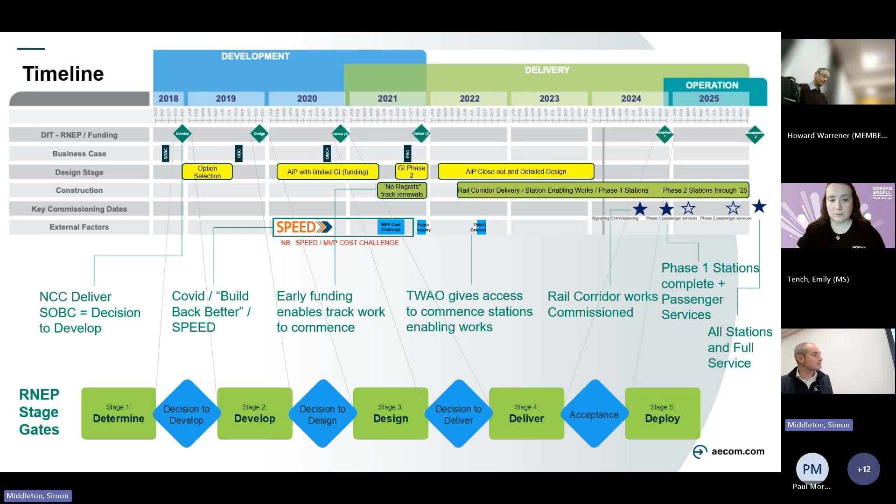So Northumberland County Council essentially have owned and sponsored the project. They've put funding into the scheme as well, so it's not all central government funding, and that's meant they've been able to really connect the local needs with the outputs of the project — for example, thinking about the requirements for where the stations were placed and the access to the station as part of the local active travel and cycle route networks and those sorts of things.

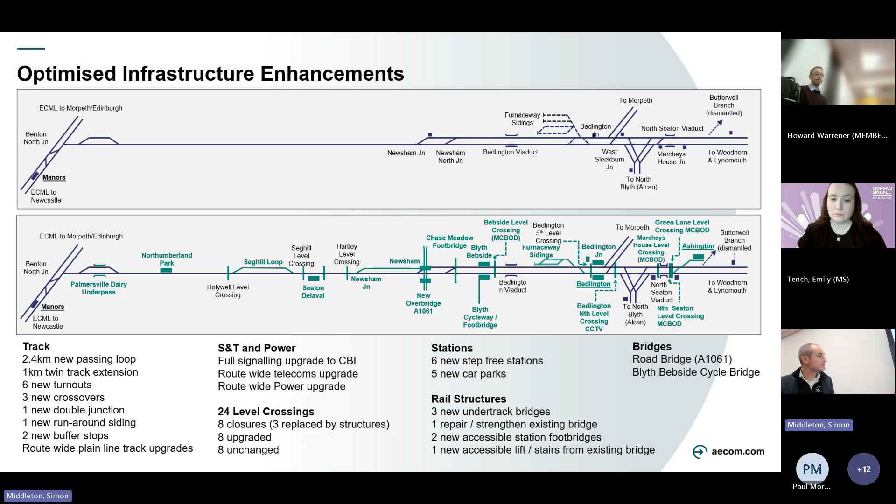And when I talk about the conductors, that puts a grin on my face, because last time I went up there I was talking to a conductor called Ashley who lives in Blyth. He was really just buzzing about the fact that he's now got a job working on this railway that's about 2 minutes from his house. He can cycle to his place of work, and there's this real local ownership around the project, which is fantastic.

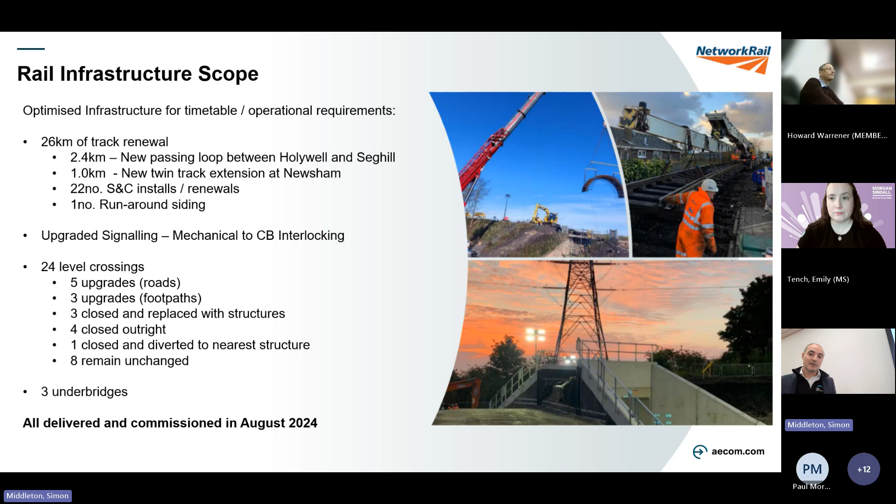And as I've touched on, there's 24 different types of crossing where either foot crossings or road crossings cross the railway. Those 24 have all been upgraded in different ways, but with some being closed outright. So that saves money in the fact that you don't need to introduce the infrastructure, but it creates a challenge that you have to go through a planning process to get those closed. Network Rail and their supply chain were also responsible for the construction and strengthening of 3 structures beneath the track.

We live in a pretty constrained environment in terms of budget, and linked as well to project speed. There was a real challenge on this project to make sure that everything we wanted to deliver was justifiable, and it was the lowest cost solution to give the solution that was required. So there's this phrase used in the railway industry called minimum viable product - essentially the lowest cost solution to delivering the output you need. We applied this before it was a thing, before Project Speed. We were already working on behalf of the local authority and the council to make sure this was the most cost-effective scheme possible.

That meant that when we're looking at the level crossing upgrades, there is an option to improve with modern technology all of the level crossings, but we went through a filtering process to make sure that the costs weren't disproportionate versus the risk for those level crossings. And as I say, we closed a few. I've also highlighted their...

Newsham level crossing. So this is a level crossing where the A1061, which is the main road into the Port of Blyth, crosses the railway. And in the morning peaks, just with the freight services, there were always challenges around the level crossing barrier downtime at this crossing, and the traffic would back up into the port.

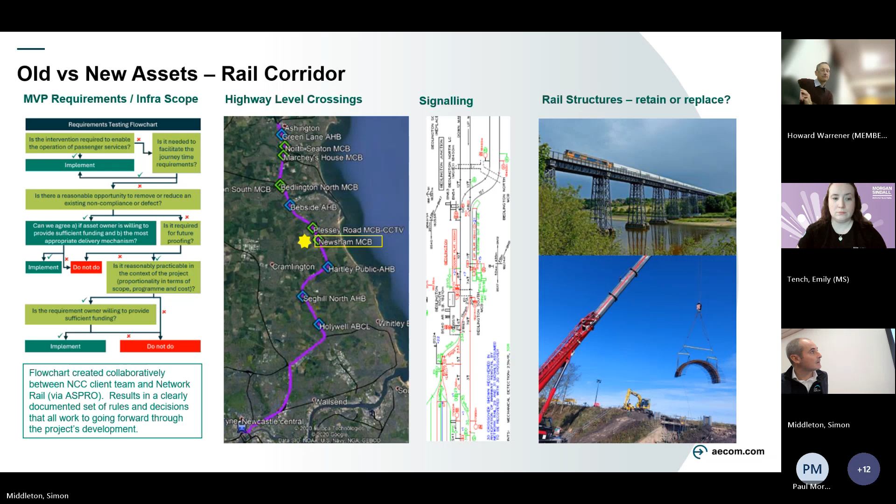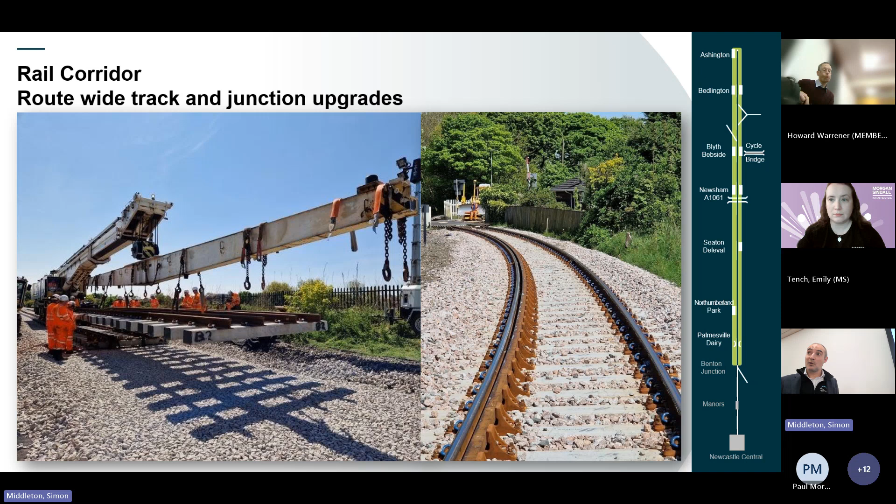As well as replacing the old track and old rails, there were quite a lot of junction improvements required to bring them up to modern standards for the required line speeds. This work was delivered predominantly throughout 2022 and 2023, so essentially the railway element of this project was delivered first. Some of it was done on a 'no regrets' basis, because the track was so old it needed replacing anyway, so Network Rail and their supply chain started before the project was fully funded, on the basis it would be money well spent.

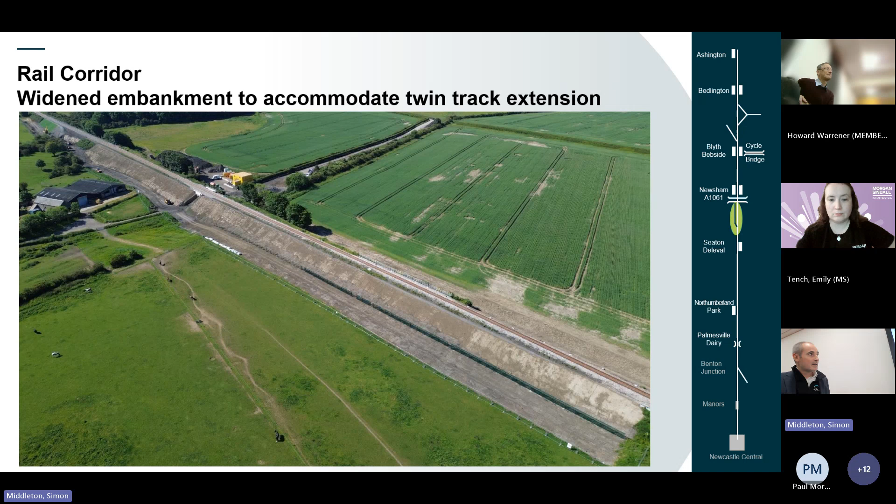As I've touched on, they've replaced 3 underbridges, predominantly in areas where the track needed to be widened. This is the section south of Newsham, where we needed a twin track section on the embankments. The embankment in theory was wide enough, but the alignment before we started weaved along it, because over time maintenance teams had shuffled the track into the middle as the embankment eroded. So it was an important aspect to upgrade that section of earthworks.

We've touched on Bedlington Station, which is flanked at either end by level crossings, with a track junction and signal box in the middle. This is quite a constrained site, but it was really important that Network Rail delivered the railway upgrade elements and were out of the way of the level crossings before Morgan Sindall could come along and deliver the stations.

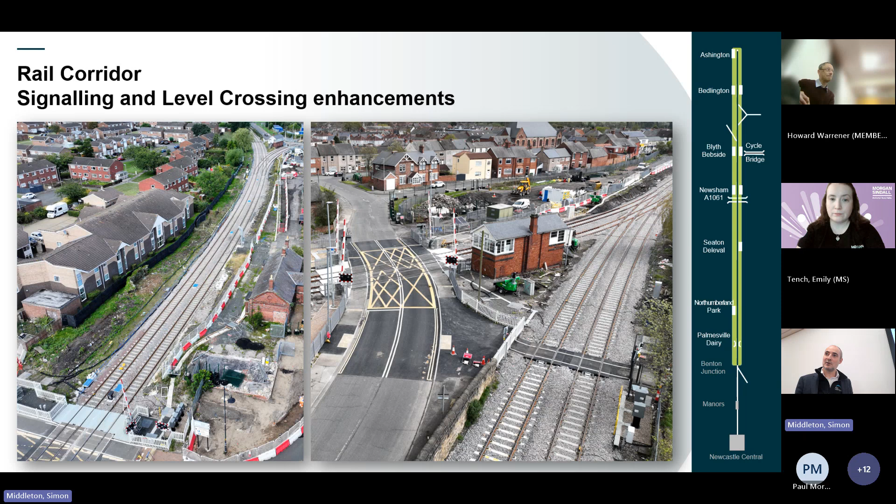Also, this is a constrained site - on the left-hand side of the left-hand picture is Sleekburn House, a residential home. So we're working in a very constrained urban environment, drilling holes, constructing literally outside people's windows. The public interface, stakeholder management, and communications about who was going to do what when was a really important aspect of this.

So we'll go on to the stations and the structures. This is the element delivered essentially by Northumberland County Council and Morgan Sindall - 6 stations, 4 now open, 5 of them with car parks. The car parks are of differing scale, linked to the idea of minimum viable product and funding constraints.

One of the challenges we had with the project, as costs started to go up, we were challenged by the DFT to take costs out, and one area where that could be done was reducing car park size. We've got the land for bigger car parks, but at the moment we've only constructed, say at Seaton, half the scale of the car park initially planned. At the moment those car parks are absolutely chock-a-block, which is a challenge, but we don't know if that will be the case once all the stations have opened. So I'm pretty confident that in future years there'll be work to expand those car parks using the land we've got.

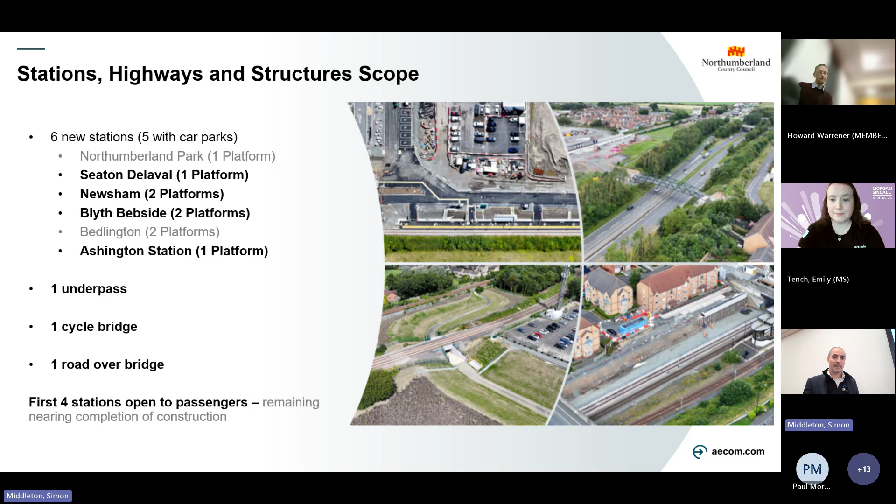I'll go on to some of the other elements, the underpass and the bridges, as I've got some specific slides on those. This is the southern end - this is Palmersville Dairy. You can see what was there before: just this pedestrian foot crossing across the railway.

Initially, this was going to be replaced by a bridge, but this element of the project went through local planning with North Tyneside Council, and it was really important from a planning perspective that the solution fitted in terms of the local cycle network, and also provided access for horse riders and equestrian use. The result was that we had to put this underpass in beneath the railway, which is a pretty significant piece of infrastructure.

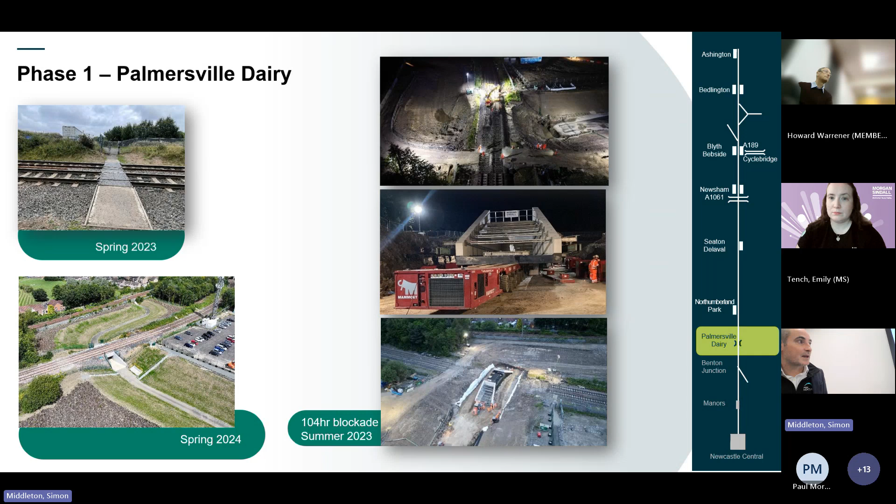This was one of the first pieces of work that Morgan Sindall completed, in the summer of 2023. The conditions were okay in terms of weather, but essentially the railway was severed. Network Rail supply chain came along and cut the rail either side of where the structure was going in. Then Morgan Sindall pushed the structure under the railway, it was reinstated, and then Network Rail's suppliers, which was Balfour Beatty, put the track back on top. That was one of the first significant milestones in delivery of the stations and structures work.

These were the first two stations to open, in December 2024. Ashington at the top - you can see in the photos there was a station here historically, just on the edge of the town centre in Ashington.

When we first started the project, particularly some politicians thought we'll just reuse the platform, but it wasn't that straightforward, because to create the up and down passenger service and allow freight to carry on running up to Lynemouth Power Station, we've had to move the platform to the left in that picture and introduce essentially a turn back facility. So the trains run up to the platform there, they stop at the end of the railway, and then they come back down.

So the car park there was also significantly extended - there was a car park here for the residents of Ashington, but that's been extended quite dramatically. And in the bottom left of that picture, you can see the Portakabin, which is the conductor facility for the Northern train crew.

The next station down, similar in construction in that it's a single platform station on a single line section of the track - this is at Seaton. You can see before the station was there, this was essentially just a field, so this is a clean slate. You can see in the bottom right picture the train pulling into the platform, and the car park skewed away from the station.

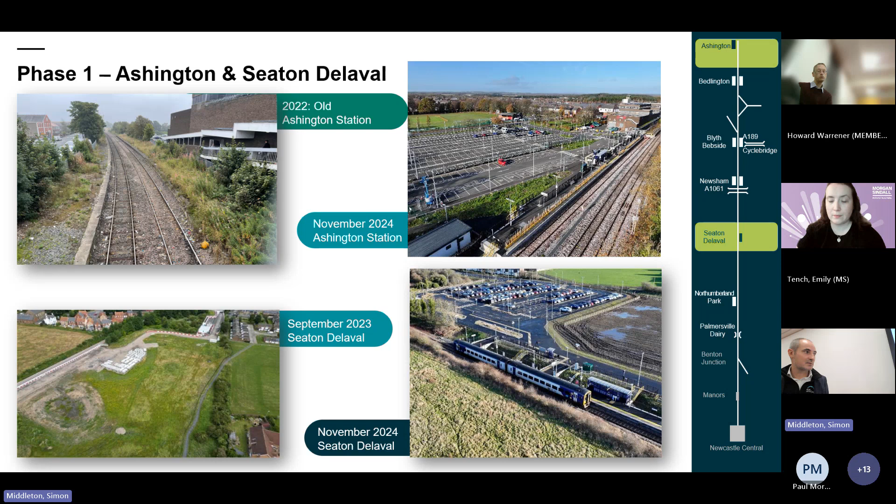So then we'll go to Blyth Bebside. The two stations we opened this year are both either side of Blyth town. Bebside was the one that opened in September this year, and this is to the north of the town.

To access the station, essentially you've got the A189, which is one of the main spine roads into Newcastle. We've constructed this new cycle bridge, so this provides good pedestrian and cycle access to the station. You can also see the car park in the bottom right picture. There's good access here off the A189, and this can operate as a park and ride - people from further north can come down the 189, pull off here and get on the train, and it's only 20 minutes into Newcastle from Bebside.

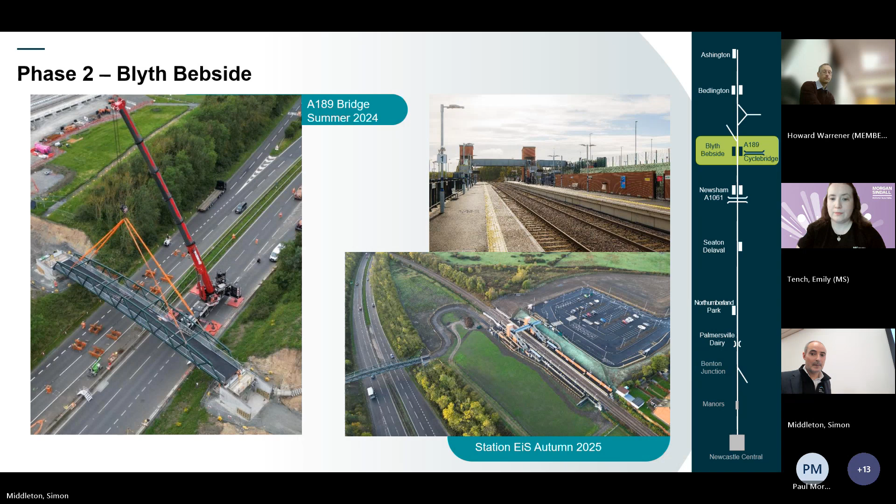Then Newsham, so this is the one south of Blyth. In the top left picture, you can see what was there originally - just to the top of that roundabout, that's the level crossing over the railway. That's what we saw in 2021 as we started the ground investigations, essentially some pretty wet and soggy fields.

In terms of the project progressing, the key element was getting that bridge in. There was a key date in November 2023 when this crane was on site ready to lift the bridge deck in - that was a key moment.

Sorry, just going to have to excuse me, my battery's going to die. Right, panic over - we've got power.

And then you can see in the bottom left, I put this in because I think it's a brilliant example of what you do in design - the digital model you create, which is the bottom left, and how that then becomes reality. You can see the bridge going over the railway there, and the station underneath the bridge, and now that level crossing is closed, but you've got access to the car parks on either side.

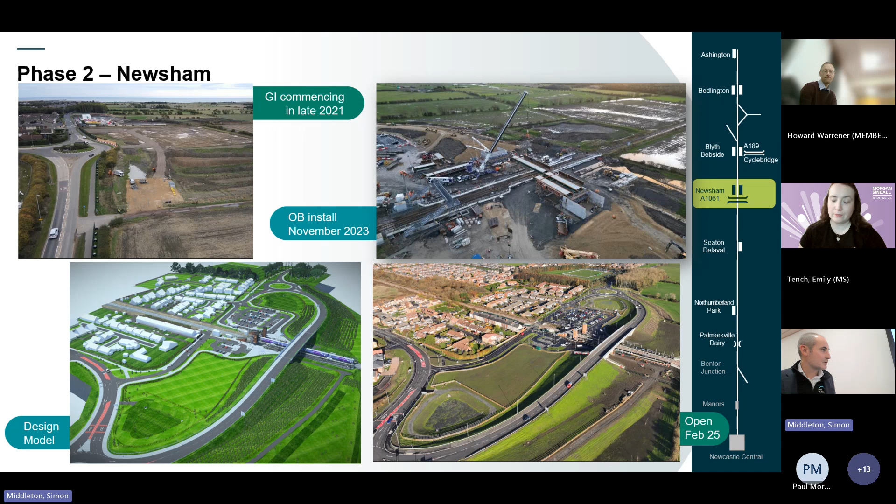I've put this next slide in to compare and contrast the two. Left is Newsham with the bridge going over the railway, and the right is Bebside. You can see the core elements of the station are almost identical in terms of the lift, the bridge, the stairs, the platform construction. So to help with efficiency, delivery and cost, we've tried to keep consistency in the design approach where possible, and that feeds into delivery.

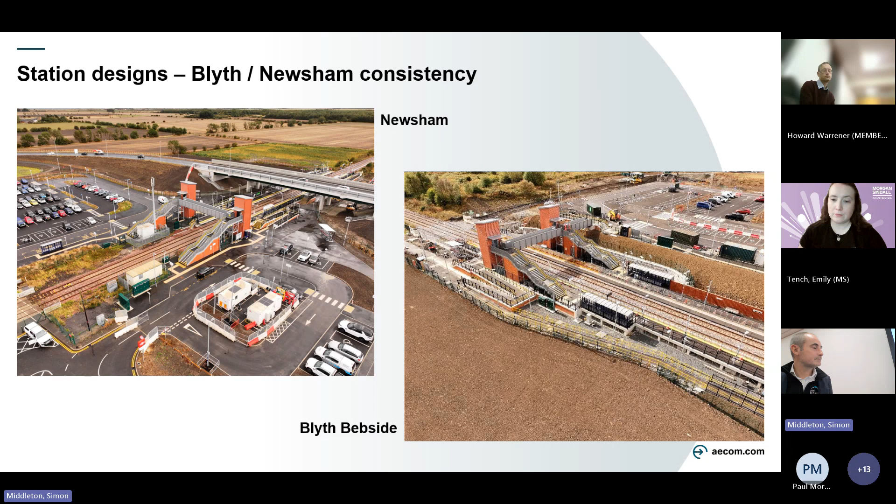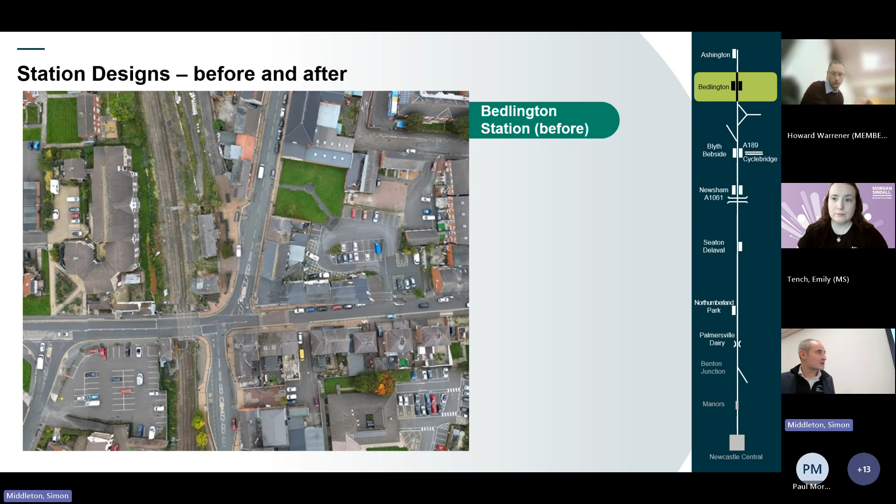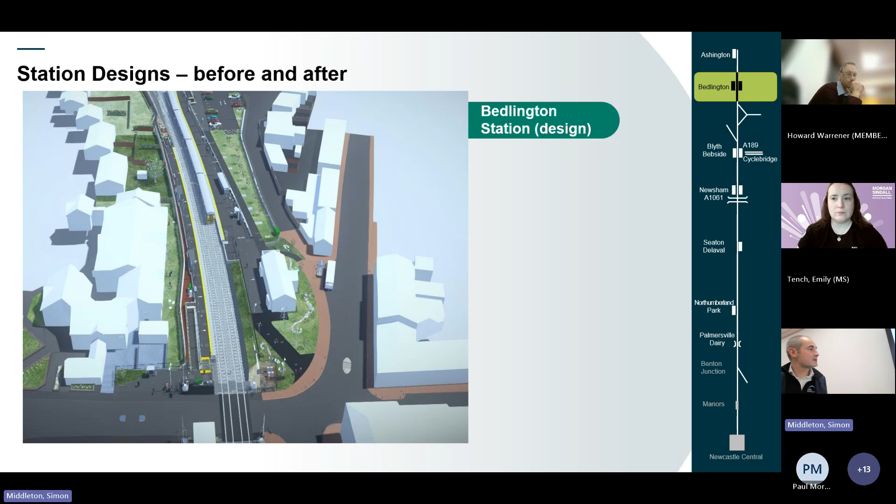So you've got access on the bottom right where that old building has been demolished. You've got 2 new platforms, so as I touched on, the left hand side platform is squeezed into that very tight sliver of land adjacent to Sleekburn House. And then you've got some fairly simple station furniture on the platform.

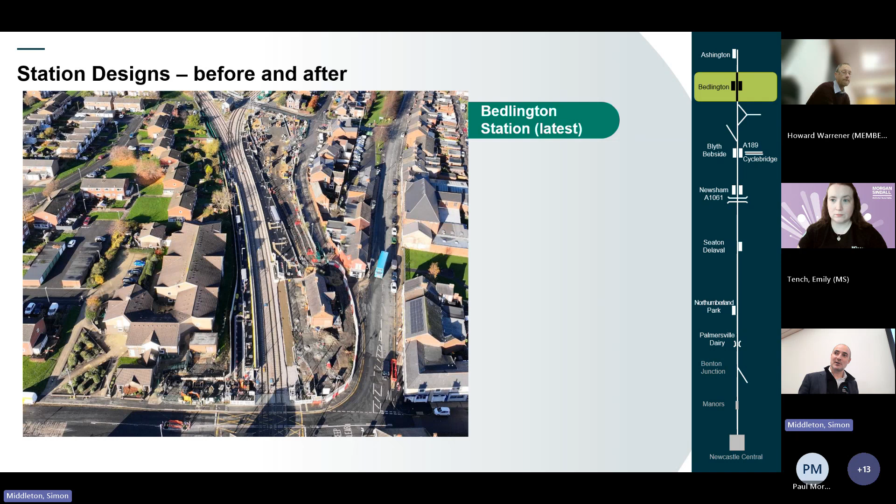And you can see this is the reality as it is essentially today. This is probably from a couple of weeks ago, but this work is very close to completion. The platforms are in, the platform furniture's there. It's really just that bottom right corner, the access where that old station building was, that needs to be completed. This work is broadly due for completion this side of Christmas, but the station won't open until probably late February or March, because when you finish construction there's quite a lot of industry process you need to go through before you can actually open the station.

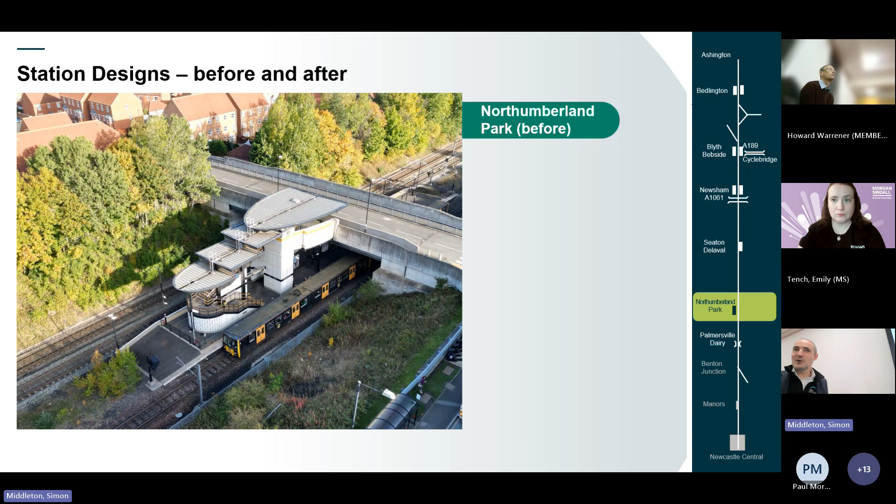And then the last station will be here. This is Northumberland Park as was, the metro station. I think it's worth taking a close look at this, because on the left hand side there's this heavily vegetated cutting slope, and Northumberland Park metro station has been squeezed in there. There were many visits where we looked over the edge of the bridge and thought, how on earth are we going to squeeze a station into this tight location?

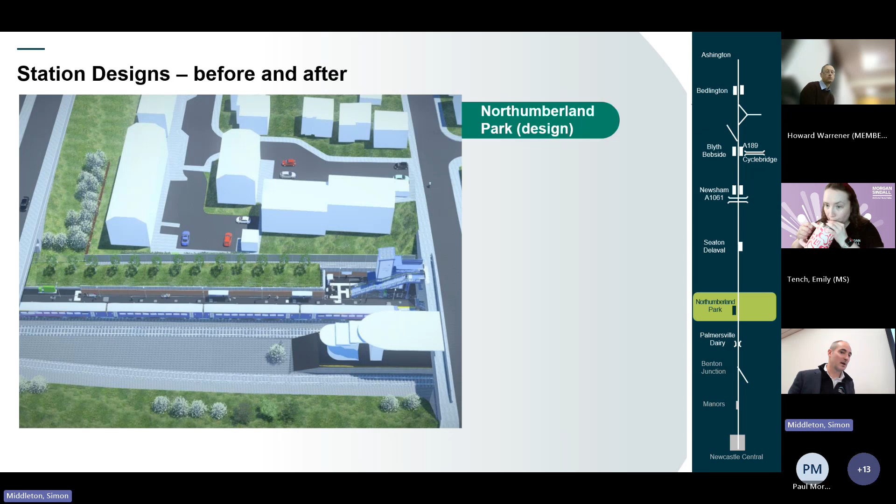But you can see here the design. Essentially this is again a single platform station where access from a lift and stairs comes down from the bridge that goes over the railway, and we squeeze the station in. As I touched on, this site is really important because it gives access to the Tyne and Wear metro as well.

Going back to what I was saying about local residents, the flats known as Fenwick Close flats next to the station have had to endure 2 years of work essentially in their back garden, and credit to Morgan Sindall and the stakeholder management team, the relationship with the residents there is excellent, to the point that there's one chap who lives in the flats who runs a daily blog and wants to know what's going on every day. They've put up with a lot, but I think they've put up with it because they know the long-term benefit it will give them, because they won't need a stopping service into Newcastle on the metro now. They'll just go straight through, and there are the wider benefits of the Northumberland line.

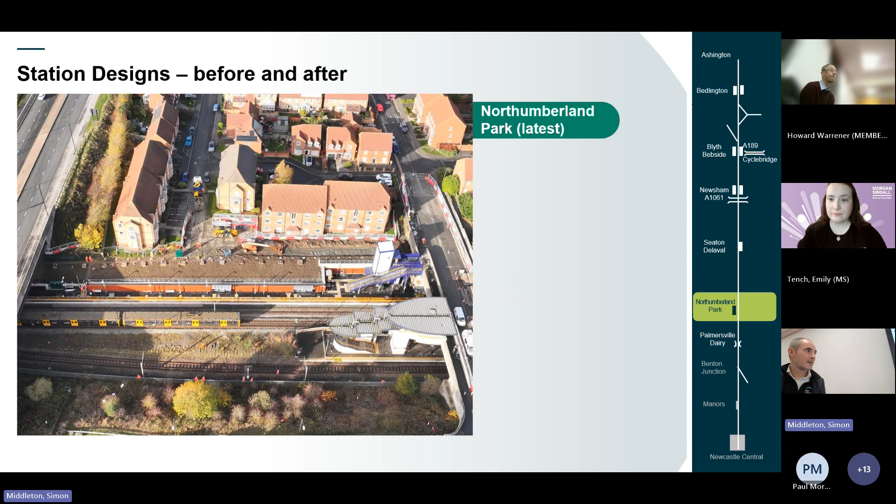So I'll just touch on some lessons learned. I want to reflect on a few things. I'm not going to go into masses of detail, but a key element of the lessons learned is the fact that there are a lot of other projects that want to do what Northumberland Line has done.

For example, down in the southwest, there's the Portishead Line extension, a project that was actually a stage ahead of us when we started, but they're just about to start construction now. There are projects in South Wales, and there's a project called West London Orbital, which is a conversion of freight to passenger use with new stations in London.

And I guess we're here in Rugby, we're not that far away from where East West Rail will be happening. A big element of East West Rail, the Marston Vale section, is a section of upgrade of existing railway and new stations.

So there's lots of projects that have similarities, and as I'll go on to describe, this hasn't been straightforward. So it's really important that some of the things we've been through are not repeated, and these other projects do learn the lessons from it.